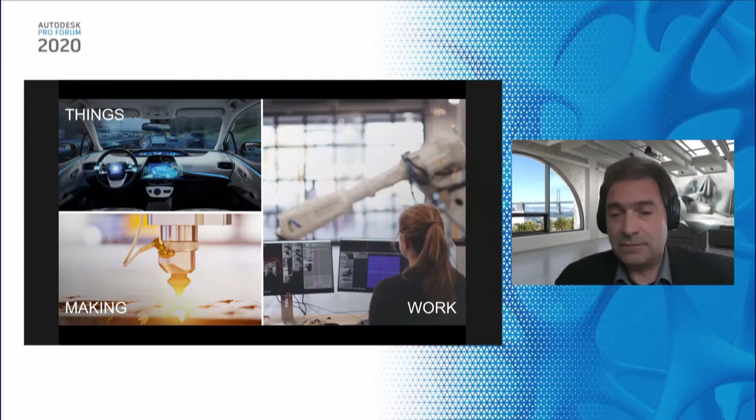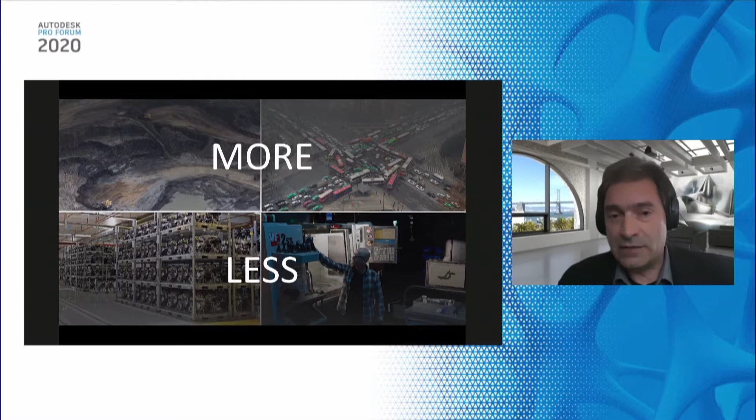We still need to produce more, but with less negative impact to the world, while also dealing with less qualified workers, producing less waste. That's actually a fundamental capacity issue. One of the biggest opportunities also in design and manufacturing, the opportunity of doing better.

One of our customers, Ørsted, the leading energy provider in Denmark, changed completely from fossil energy to green energy and was recently awarded as the most sustainable company in the world. Mr. Poulsen said, our old business model based on fossil fuels had to be replaced by a new model that was environmentally and also financially sustainable.

Investors and employees recognized and valued their transformation. So we reached a new era, the new era of the new possible.

A huge amount of organizations were just not ready to have their workers work remotely. Mindset, policies, processes, and systems had to be adjusted to make this work as countries were facing lockdowns.

Global travel slowed down, and most of us experienced at least an interesting mix between our private and business life. But after some struggle in the beginning, it worked. And research shows when things are better, we will not go back to the old ways. We will travel less, work more remotely, and adopt modern technology earlier.

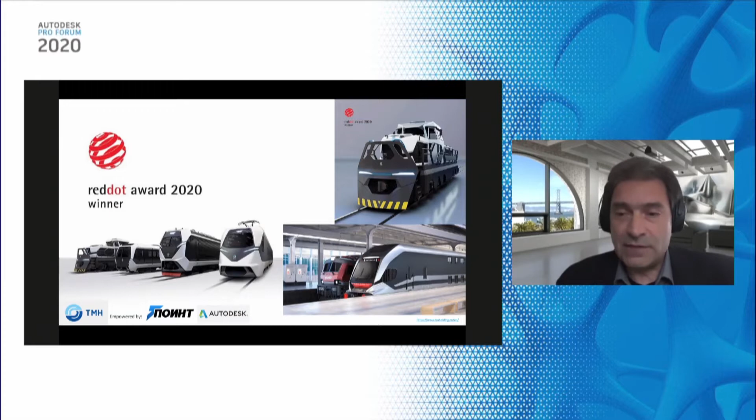What we see in the area of new possible are three big themes I would like to talk about a bit. Number one is automation, you heard already a bit about that. Second is collaboration. And last is the topic around convergence. Let's start with automation.

Working for a software company, it's clear that we are convinced that automation can help us overcome some of the capacity gaps we talked about earlier, giving us time to be creative and innovative. But there's much more. We now realize that we haven't really done our homework and finished our job digitizing our operations.

An example I experienced personally: orders can't be shipped because people are not willing to come to the factory, and orders may depend on a single machine operator just not showing up.

As we removed slack in operations and supply chain, as we follow Kaizen methodology and push for just-in-time delivery, we also now realize that it came with some disadvantages too. There are no buffers, no alternative sourcing. Sourcing nowadays deals with much more suppliers, smaller quantities from all over different regions. As it takes a while to ramp up classical volume production and achieve somewhat a normal performance in the global transportation markets, we just lost predictability in our business.

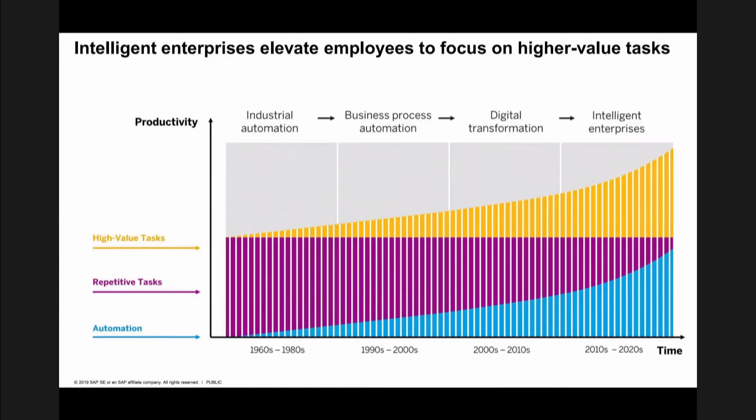Especially this pragmatic approach with business impact is the strength of Autodesk and the ecosystem.

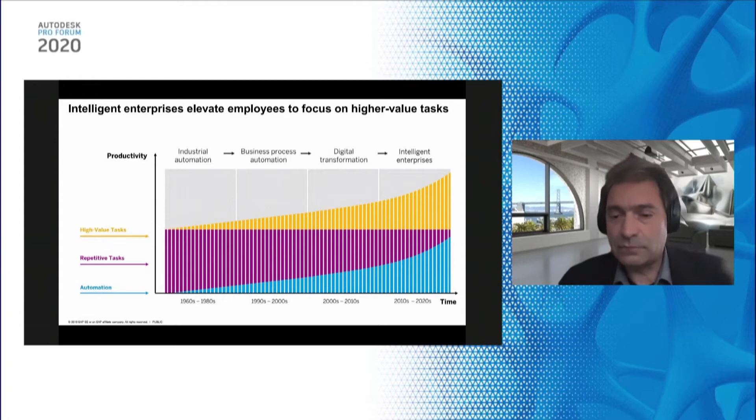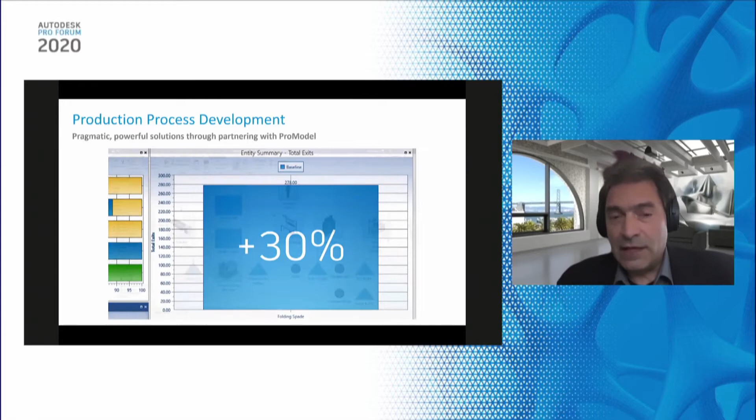Speaking about pragmatic, on the factory business, we partnered with a company called ProModel, which allows you now to add statistical scenarios, modeling, as well as providing you much more other factory-related capabilities. We are now getting close to the big systems in that space, but without requiring an expert team of professionals and PhDs.

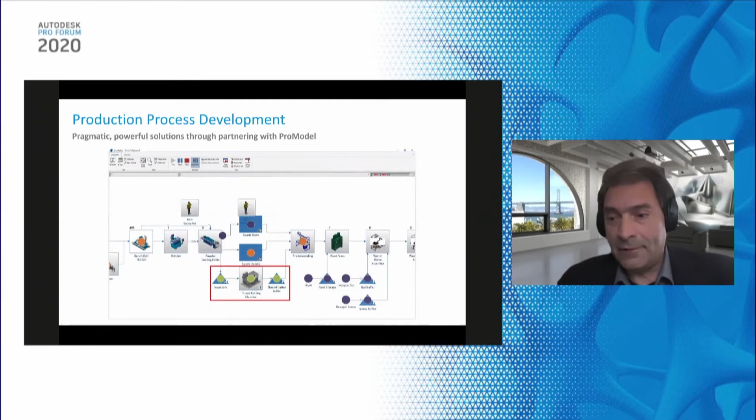Here in this scenario, we explore what is it we have to do to increase our production by 30%. Where's the bottleneck? Do we need new machines? Do we need new workers? How much of both? We can explore different options and bring back the results into our factory planning with Inventor and AutoCAD.

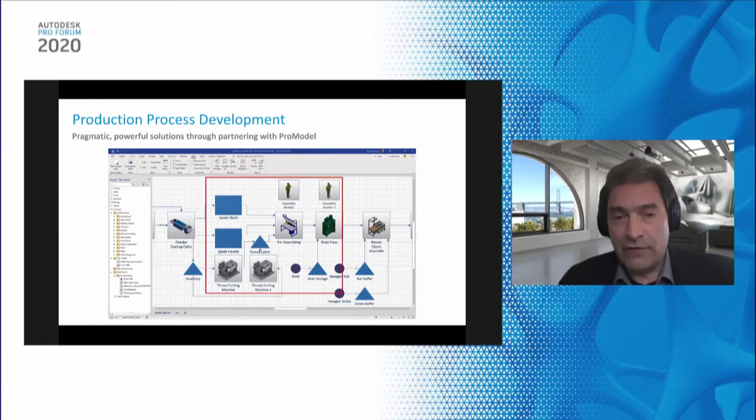Please keep in mind, missing predictability of business, that's the reason why the monolithic other systems struggle to support you. A good example here is social distancing in the factory. Using ProModel capabilities as a part of the collection, you can get very quickly an understanding on what it is which is going on and what it is need to be looked at.

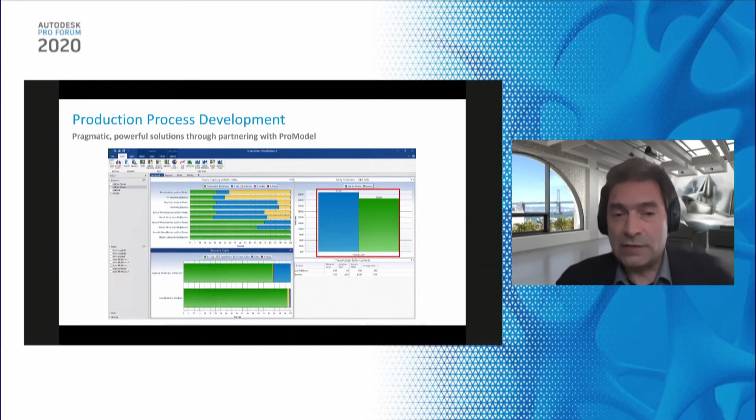Here's another example from Autodesk Vault, using automation technology to identify duplicate parts to help reduce the engineering times, but more importantly, to reduce the items and complexity on the shop floor or in service. Often, even when parts are geometrically the same, they carry different part numbers. This results in more setup time in production, lower efficiency of the machines, lower utilization, and more unnecessary spare parts.

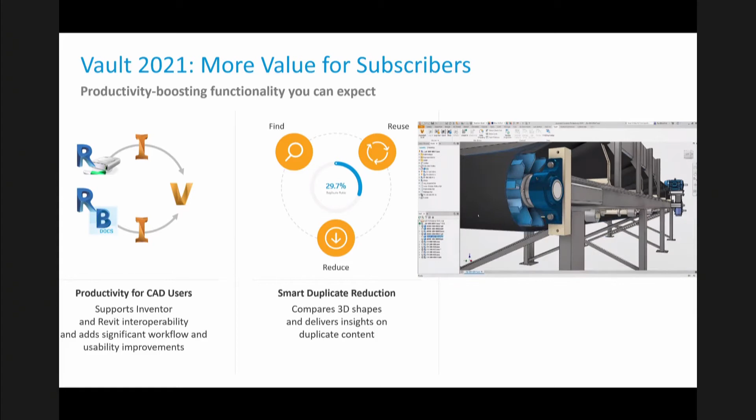Autodesk Vault addresses this, reducing your cost in operations, and helps you improving the cost and turnaround time in service.

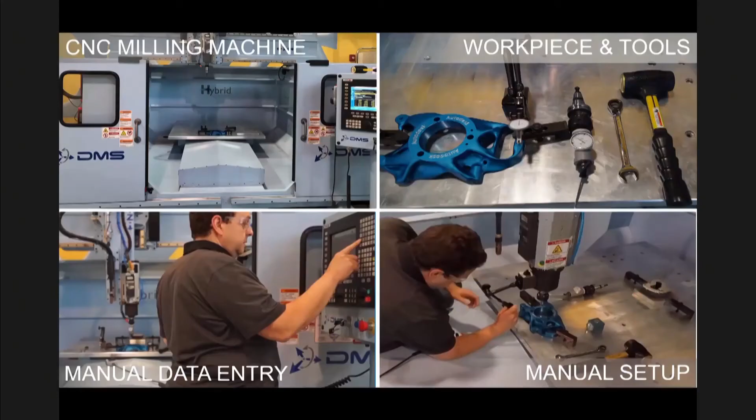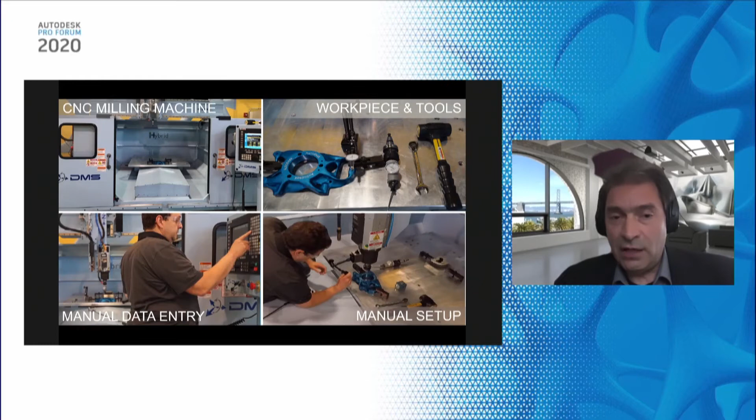Here you see a scenario on the shop floor. You remember the order which couldn't be shipped I talked earlier? There's a lot of manual processes we need to digitize more, which makes us talk about what we call the convergence of design and make. Knowing the impact of manufacturing and manufacturability already in engineering and accommodate for that upfront. That's what we are tackling with our Fusion 360 platform.

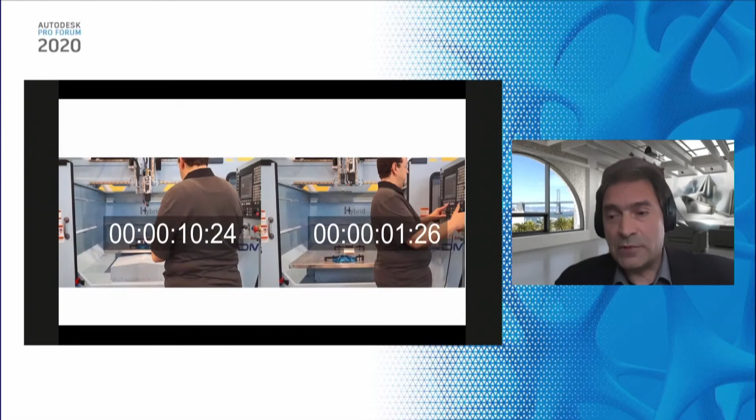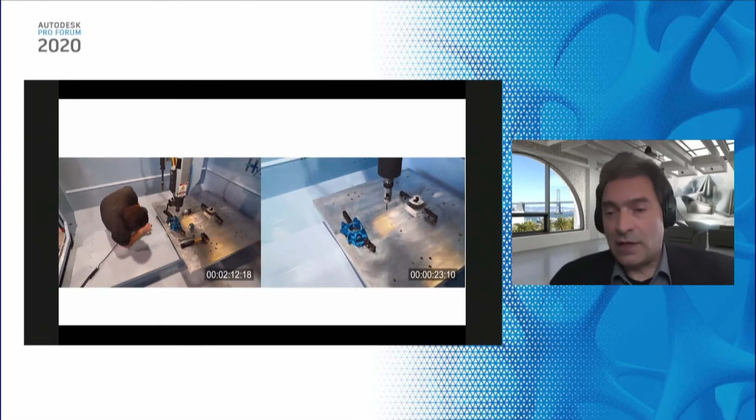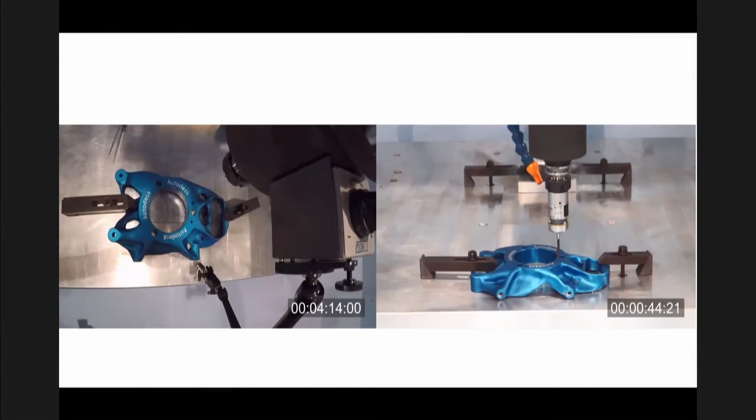Customers are trying to eliminate dependencies, for example, from a machine operator, the capabilities and capacities through automation. You see an automated measuring process on the right side with an adjusting machine procedure, resulting in overall production time much better as we take out the repetitive task of positioning the parts, resulting in higher quality, less dependency on workers' knowledge, and companies use that to digitize their knowledge, thanks to Autodesk Make capabilities.

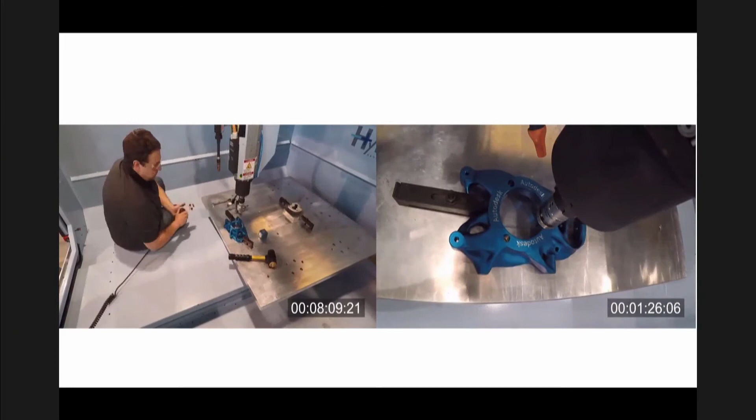1,400 sprinklers. Every design change from the architect was about to cost him 350 engineering hours, 350 hours he wouldn't get paid for.

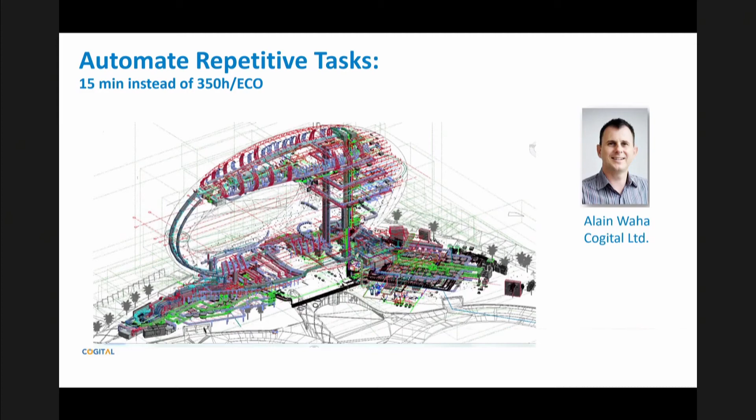Using design automation and the Autodesk Forge platform, he automated the dimensioning of the sprinkler system, the positioning, the quantity takeoff, the compliance checks, and now the complete model is up to date in 15 minutes after a design change from the architect.

That results into hundreds of free capacity hours in engineering, where he now can do much more motivational work, have fun, and more importantly, get really paid for. It's also resulting in a much better value-oriented collaboration with his customers.

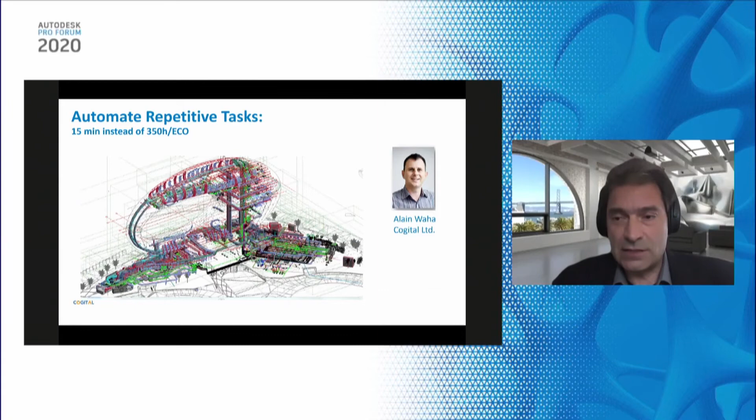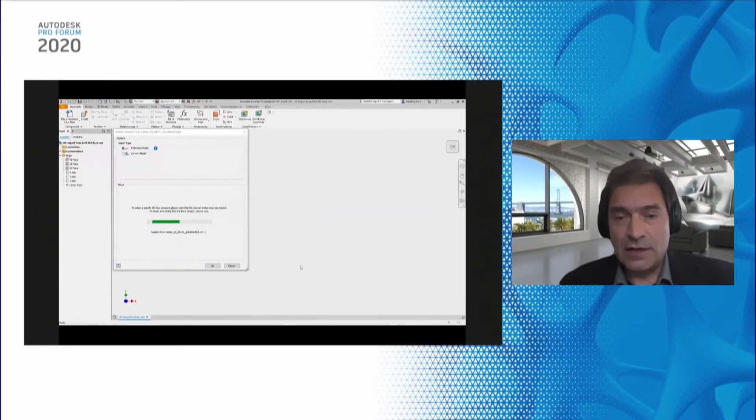So let's talk a little bit about collaboration and convergence. Here, I would like to show an investment area of us to better collaborate between the AEC community, the architects, and the building product companies on the manufacturing side, the suppliers for the building.

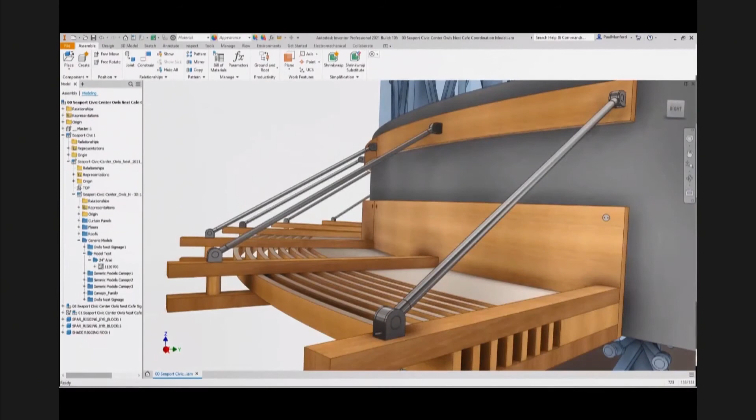You can see an associative access between the BIM model and the mechanical engineer. This is also to better collaborate as things are changing often and design costs, quantities, production schedules will have to accommodate as well, taking out non-value added tasks and the synchronization between both parties, which is currently extremely time consuming.

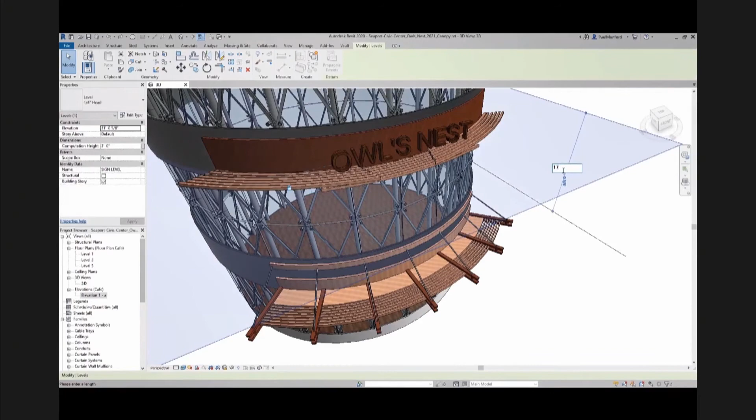Now here I'm proving to you the associativity. When you have a change on the BIM side, all the engineering will change in Inventor. This includes production drawing, documentation, simulations, and you may have set up certain certifications through simulation, or even CAD programs and CAM programs for machining.

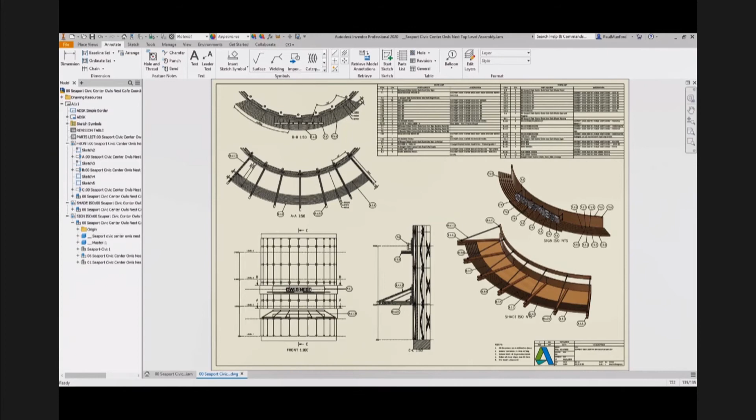And all this collaboration can happen through our project platform called BIM 360, meaning you don't have to call your customers to request and convert files. Updated documentation can be made available back to your customer, allowing him to work with actual and correct information for his planning.

But collaboration and convergence doesn't stop here. Using the Autodesk Construction Cloud, we can break down BIM and planning information accordingly to a discipline or even according to the scope of work for a particular supplier.

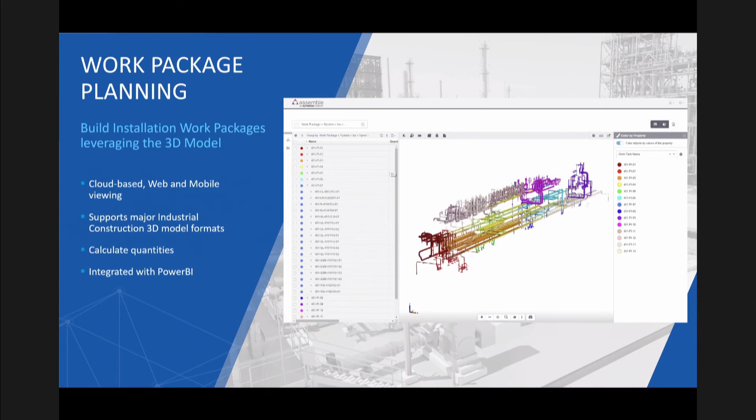Especially for capital-intensive projects, CapEx projects in the process industry, that's really, really cool, as you don't have to filter the BIM model over and over again. You just condition it once in so-called work packages. By selecting the information, for example, for steel construction, your vendor will automatically stay up to date with the right model data for better project execution.

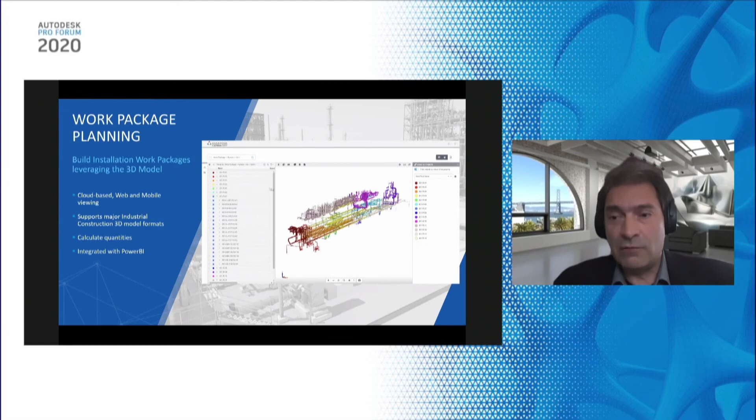We also see manufacturing companies leveraging the capabilities to deal with prerequisites for their machine installations or shipments. This is a different form of, if you want, a personalized digital twin, the portion of the digital twin which is relevant for you as a supplier.

We know that the project execution is a very big topic for our manufacturing customers, and we are helping them, for example, to better plan their digital construction sites upfront as a part of the digital transformation process.

The Autodesk Pro Forum is really a great opportunity to learn about best practices and possibilities. It will be you, you will make the difference in your organization. You are surrounded by peers with similar challenges, you are surrounded by experts who can help you. Please use the opportunity to collaborate. Please use this also as a starting point to work with a positive attitude towards the new possible. Better starts here, and it starts now.